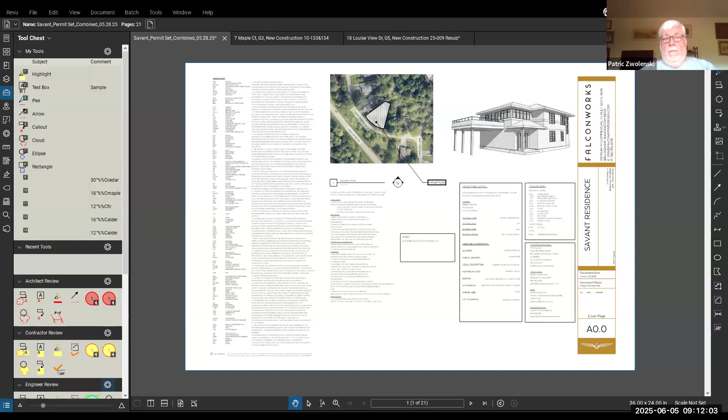Yeah, the three of us went out on Monday to look at the site and everything, and everything looks good. I'm in agreement for the variances and all. Yeah, as our policy document states, we don't generally approve carports. This is a nice design. This looks nice. I mean, I have no objection to this at all.

It really, and that's a nice feature. I wouldn't mind having that with a nice deck over my space. So yeah, it looks nice. There's no reason not to offer a variance for something like this. And it works with the lot really well.

My question with the carport, I think I saw a note in there somewhere that they're building the carport the way it's being built so that eventually the homeowner could enclose the carport and make it into a garage. Why are they not just doing that now? Financial decision? Yeah, I'm not a big fan of carports. I mean, we have garages for a reason, and we don't end up with things parked outside, and if a garage can be built, I think the garage should be built.

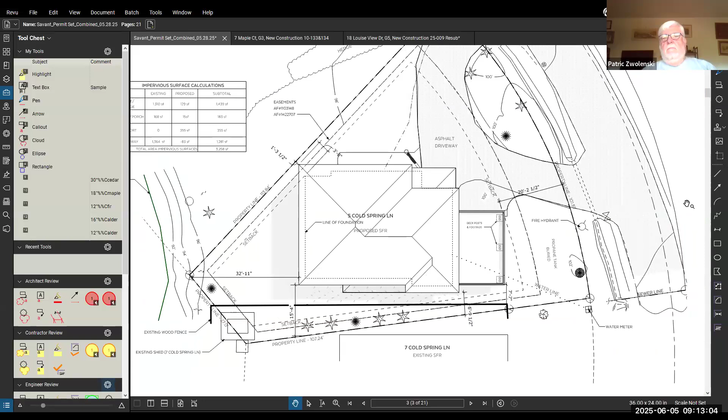Yeah, when we talked to him, it had to do with cost, wasn't that correct? I think that's always everyone's front of mind, but I think aesthetically it works for the owner's current needs. They don't have a lot of cars, they don't have a lot of stuff. I think this is just a dry place to park. So yeah, it was kind of more of an aesthetic decision. But obviously I think it could be enclosed someday when needs change.

Well, it obviously doesn't look like just a piece of plywood to cover your car. It looks like a nice structure, and that's what I'm looking at. Mhm. And I think it worked well with the lot. It is a bit of a bigger building for the space, but we are working within the constraints of the old foundation. I was very skeptical at first, Dan, and we went to look at this space, and it works for me.

Well, I appreciate you guys going to look at it. I think that makes a big difference if you can get out there and visualize what's there now to what you're going to see in the future. If it's an improvement to the community and the area, I'd rather give a little bit of a variance on property coverage or open space to make something look much nicer than not give a variance and have the crap that's there now stay there. Yeah, I think they gave real consideration to the space they're working with, and I think it's a good solution.

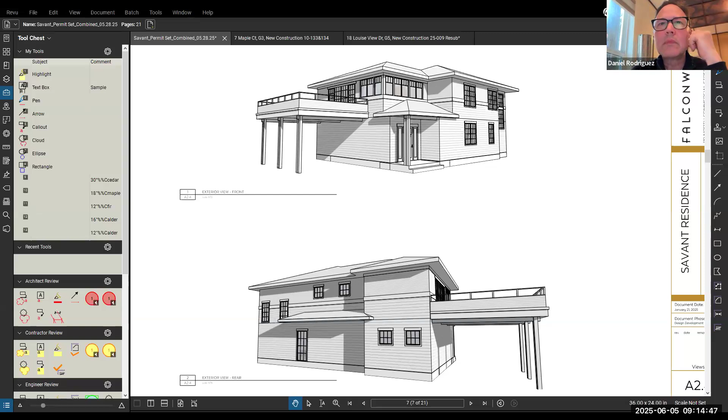Were there any other issues, Joel, that came up here? No, I don't have any other issues. They've done, I think, a good job at meeting other policy requirements, and the plans are thorough. Just a couple of little notes though. Looking at the existing plan set, it actually looked like the lines of their eaves are extending over the property line as it currently sits. So this counts as a reduction from that because they're going to bring those eaves back. But yeah, I have no other.

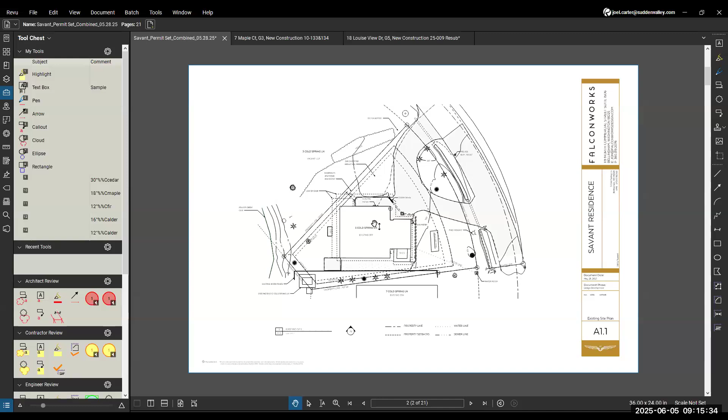So they're pulling the eaves in closer than what they're existing? Yeah, correct. They had a handful of lean-tos and homeowner specials off the back there, and it's a critical area, so we've come off of it. We've reduced our footprint. We've made our eaves smaller than we typically like them, and even jogged the foundation in that exact northwest corner just to stay off the setback. So making some effort.

Okay. Yeah, and that's appreciated. I mean, we do look at that kind of thing. And Dan, if you weren't able to visit the property, here are some photos from the Whatcom County Assessor site of what the house currently looks like.

There's a garage there now. So the garage is where the carport will be, is that correct? The same location? Correct. And then you're burying the gas tank, which is always good. Right. Those pictures look a lot better than the actual.

I didn't want to ask how old- Patric. Yeah. How old are those pictures? Oh, there were some from, I think, as far back as 2008. Oh, 2020 was the most recent. Yeah, it looked a little different the other day. Yeah. So I think, any other comments about this project?

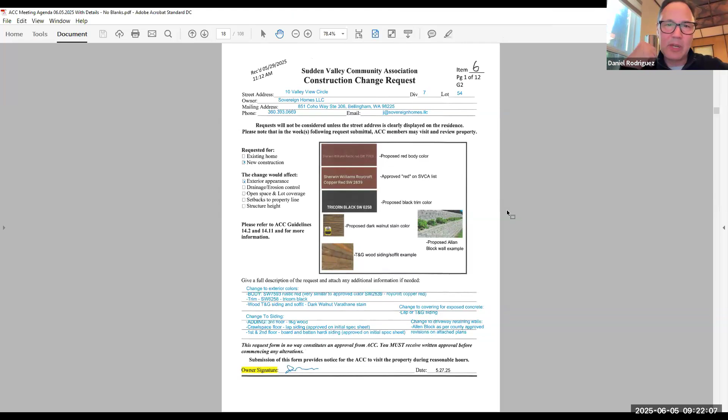Yeah, I had questions about the geo blocks. Keith mentioned them to me when he saw them coming up over there. What's the issue with that, and why did the county not permit that? So county permitted it. That wasn't the issue. It was engineering recommended that instead of doing geo blocks, for that particular type of wall that's proposed, which is an Allen block wall.

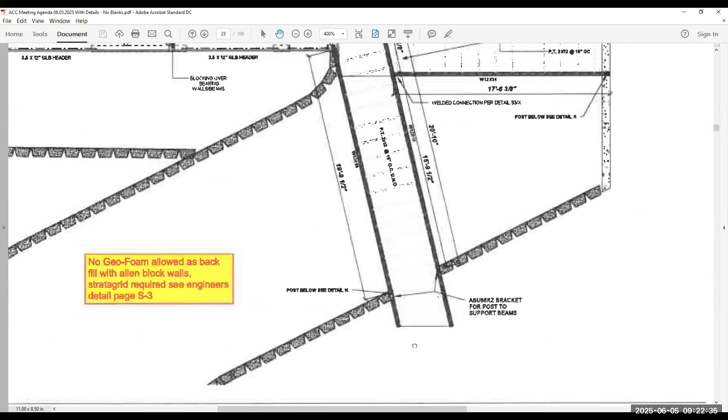My understanding is that Bradley Engineering recommended that we do some like geo grid soil thing instead of the geo blocks if we want to do the Allen block wall combined into it. So that's what that's about. County didn't have an issue.

So did you have to remove them or what? Oh, sorry. No, my mistake. Geo blocks were approved by the engineer. So what was the issue that you guys had with it? I was questioning exactly what the change was. I'm not exactly sure. Oh, okay, got it.

So just to clarify, really the main change, because there are a couple components here: colors and siding is one, and then the other is block wall. So what it is, it's very simple. Originally proposed, it was poured in place concrete walls in that area. And it's just Allen block now is what it's changed to. So it's more of an aesthetic thing that I'm here for you guys on for the block wall.

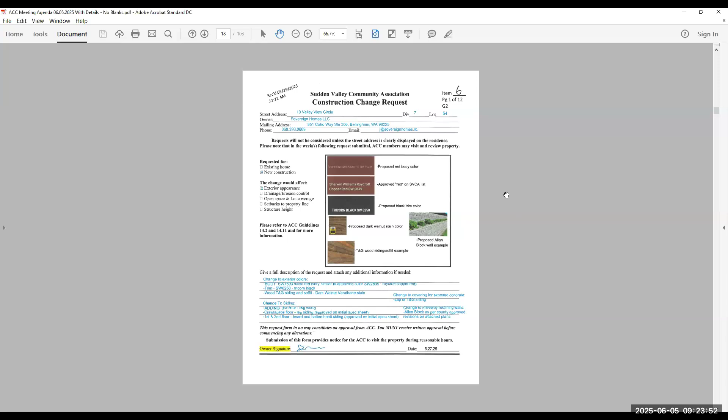So the changes to the block wall is aesthetic. They want to go to the Allen block instead of poured in place concrete. Yes, and there's still a little bit of poured in place concrete that will observe the ACC's requirements. We're going to do like a siding cover on that, so it won't be raw. So are you talking about the very front of the building where your walkway ends up?

Yeah, so I would say, Joel, if you're driving there, if you want to scroll down a little bit, you'll see, there we go. So that's the layout of the block walls. You can see the Allen blocks noted in that block looking thing. And then all the way over to the right, there still is one small section. Yeah, Joel's little cursor is right over it. That's an extension of the foundation. That is a poured concrete retaining wall there. The rest of the walls are denoted in Allen block.

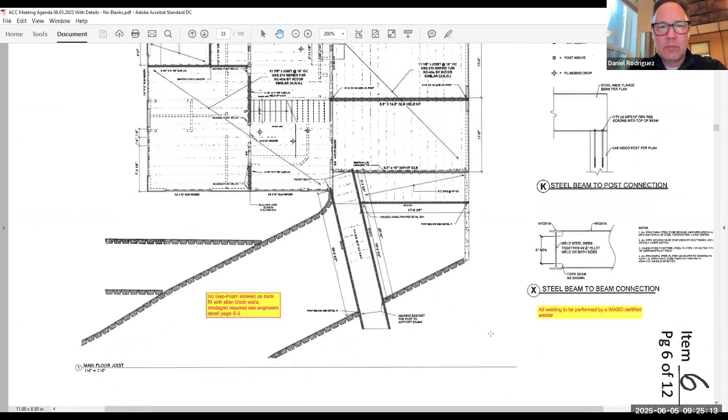So that's the layout. So Joel, do you see this as just a purely aesthetic decision for us, or is there any other issue we need to be aware of? I think as long as the engineers have signed off on it, I wouldn't worry about it. As long as the engineers are willing to sign off on it, I think it would be just aesthetics.

Okay. Well, I want to clarify, it's not a matter of like, the geofoam is not, I mean, there's a very clear note there. I don't care what the county says, but geofoam is not allowed as backfill with Allen block walls. It's not a matter of choice. You can't use geofoam blocks if you're gonna do Allen block. Right. Yeah. So there is geofoam.

My understanding is the geofoam is not in the area where the Allen block is. I don't know if you guys had a chance to look at it. There still is some geofoam that's up against the house that is backfill for that concrete retaining wall on the side, which is allowed, but we're not using geofoam anywhere that there is soil pressure against the Allen block. So we have observed what the engineers have requested. So Jay, is the geofoam just a filler of sorts? Yeah, essentially. Okay.

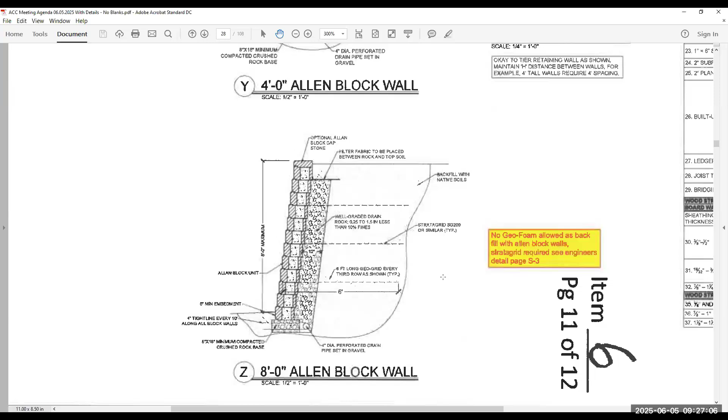It's just not stable enough to support the Allen blocks. Is that what it is? You know what it is? I think Allen block has their own specifications of what they want to see for soil support. And one of the things that they want to see is that grid. I forget what they call it, but it's a grid, and that's just an Allen block thing. That's what it is, to my understanding.

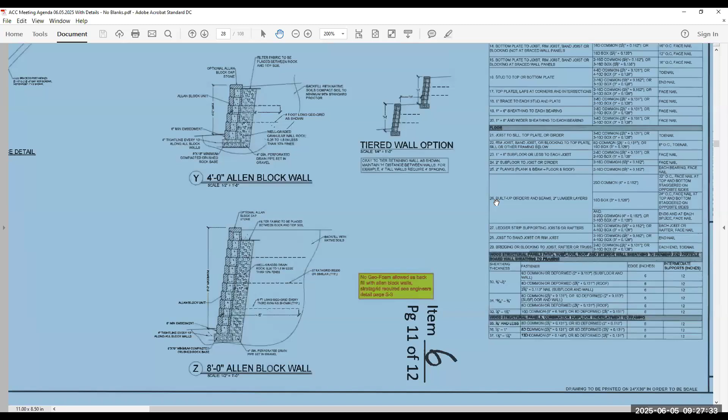Where's the profile of this retaining wall? I don't see any profile on this retaining wall. All I see is the aerial. Yeah, I think Joel's got it on the screen right here. This is your section view of the retaining wall. Oh, there it is. Yeah, and this is signed off. Bradley Engineering did this for us. Any other questions, Dan?

I've walked by this place many times and I'm not sure how any of this is going to work. There's three levels of windows. Is that wall going to be basically right in front of the lowest, the basement level window? Not the driveway, but you've got another wall that runs into the driveway there. It looks like that's going to basically be right in front of the window. It'll be 8 feet from the window.

Joel, if you could scroll down to that aerial view, the overhead again, that'll give a better idea of the layout. So yeah, that space there where Joel's cursor is, and I do know what you're talking about, Dan. That's approximately 8 feet between the windows and that Allen block wall there. It's sort of stepped back as like a terrace.

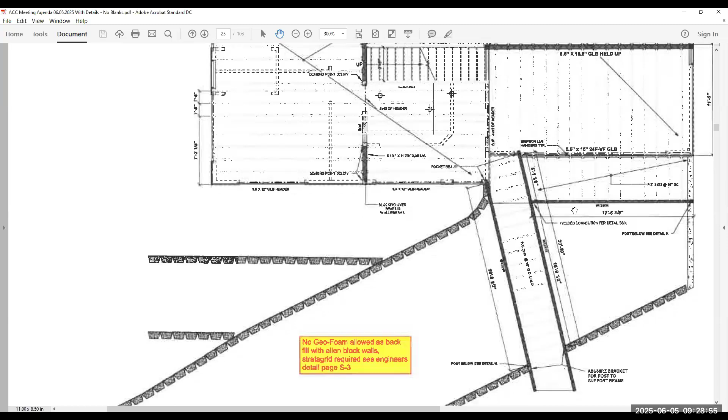So how high is that wall there? Right in front of the building? Yeah, that one. Let's see. I believe these walls, the engineering is 4 to 6 feet is what the detail is for. And that area right there should be a 6-foot section.

I think your detail allowed up to 8 feet. Oh, up to 8. Yeah. Okay. Got it. That wall there, I believe it's going to end up at 6, maybe 7. It kind of depends when it's installed, but we can go up to 8 feet with the detail. Obviously the goal is to try to keep everything as short as possible.

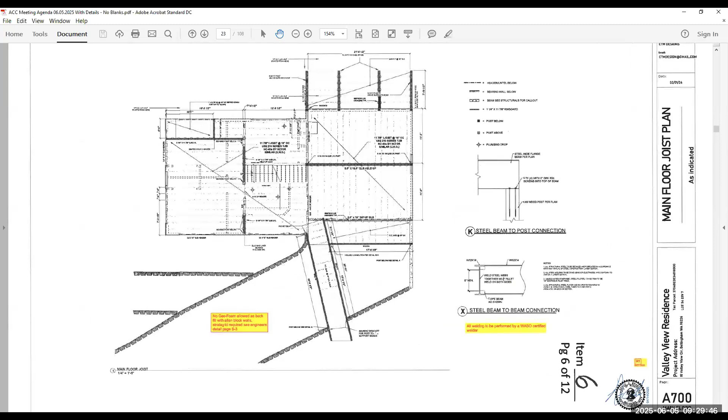Any other comments, Dan? They don't require any rebar or any concrete fill in this Allen block? So if you go down to the detail of what the engineers have specified in the section view, that's what the requirement is right there. So the magic of Allen block, as it's been explained to me, is the way it's designed. It's like a locking mechanism in the surfaces of the brick, and it kind of holds it all together.

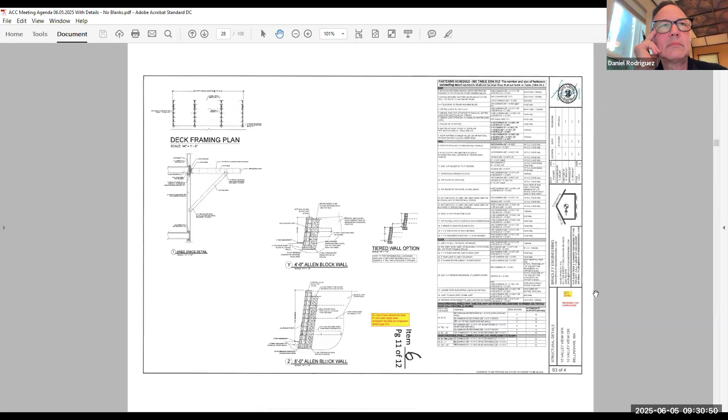I guess it doesn't seem like it's all that great to me, but if the engineer signed off on it, then it's his E&O insurance, not mine. Yeah, I agree with you 100%. So I guess we're looking at this as an aesthetic request, based on what Joel told us and what Jay's telling us. I see nothing else that concerns me that I understand anyway.

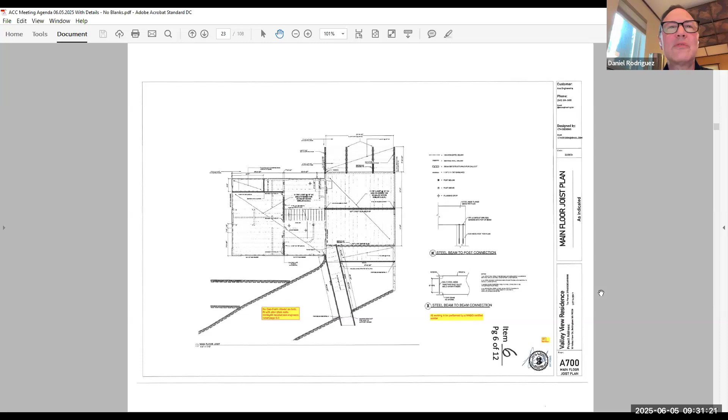And as far as your concerns about it structurally, obviously we've had an engineer do it, but there is a footing included in that as well. So I think that's helpful. Yeah, I think this is a very unusual design, and this is a solution for the space you're working with, and we have questions. Is this really going to work? At this point, we can only trust the engineers that they know what they're doing. But aesthetically, can I get a motion on this?

I move to... Was there a comment? Are we talking about just the retaining wall now, because there were some other paint and siding requests for this one too? Correct. Do you want to discuss that, Dan? This is all from one request, a construction change request.

I just was curious, it says adding third floor. Does that mean they're adding a third floor, or they're just adding the siding to the third floor? The latter, Dan. Sorry if that's confusing. This does have 3 levels, and just adding tongue and groove wood on the 3rd level. It's primarily the soffits, but there will be some accent as well. You good with that, Dan? Yeah, so we're adding some wood on the siding.

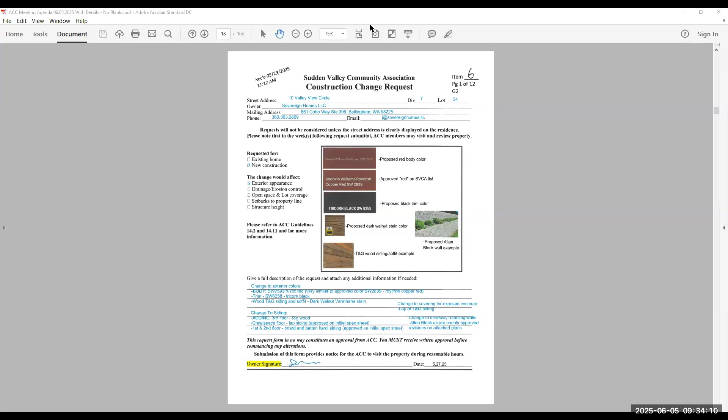Can I get a motion? Motion to approve is still on the floor. It is. Okay. And that was Patric, right? Yep. All in favor of Patric's motion? Aye. Aye. All opposed? Okay, Jay, you're all set. Great. Thank you. I appreciate y'all.

Take care. Mr. Chair, we have another homeowner join us. Jeff, are you there? Here. Okay, thank you, Jeff. You are item 7, 68 Marigold, right? Yes. All right. Well, let's jump right to that one then. Item 7.

Jeff, is this a bigger... I think John and I went out there last year sometime and looked at, you had, I don't know if it was the actual application or just talked to us about the pavers, and we looked at it, and I think it was a smaller parcel that you were going to put up there. Wasn't it smaller before? Only slightly.

This one, I just extended it so that it marries up with the stairs that are already going up the side. So it's just going to go to the end to mate with the stairs, so it doesn't look weird. That makes... Go ahead, Patric. No, that makes sense to have it where the stairs end.

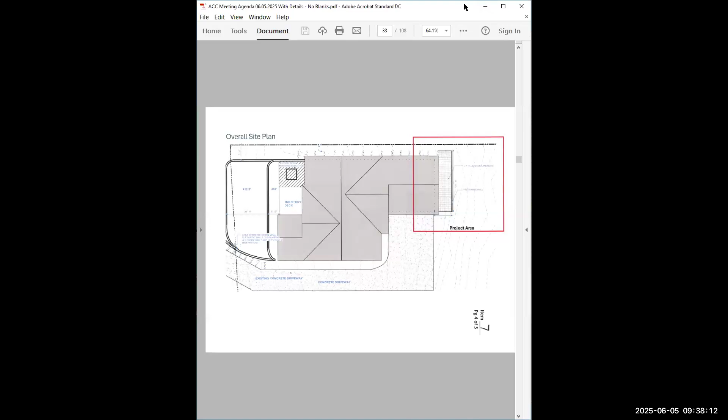Yeah, because I mean, our biggest objection when we saw your final design was that the hot tub was right there exposed. Everybody that comes by, that's what they see on your house. That's not what we wanted. So we did want some sort of privacy screen and hide it away a little bit, because of all that wall you put up there.

You're just seeing a big display of a hot tub, which if we'd seen that design, it probably wouldn't have been approved. So we were asking you to hide it a bit. And we were a little concerned that it wasn't yet, and we wanted to know what your plans were in that regard. Does anybody have any question about Jeff's explanation for the screening?

Well, I'd like to maybe request Alan to go back and look at what was approved. I do recall that the hot tub was going to be recessed into a deck. I walk by there all the time and I see that hot tub sitting there, and it sounds like they're working on that today. So if the hot tub is recessed into the deck, you're not going to see the hot tub as much. But I recall some sort of a screen. I don't recall planters, but again, we look at a lot of these.

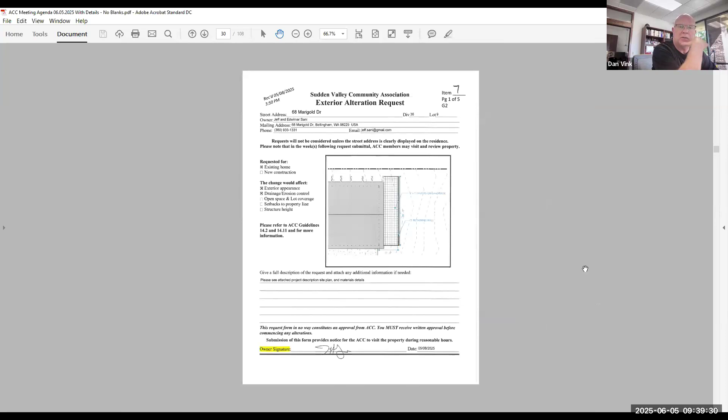So I would maybe ask Alan to go back in the files and verify what was approved for that hot tub screen. I mean, that's not what we're here talking about today. No, but I do want to keep that in mind. Yeah, I think Daniel, your question might be, do we finish up one before we approve another? I don't know.

And the other question I had on what's being proposed today, I think the same notes that everybody had, is how does this fit with open space? It looks like by the time you got the driveway and the deck and this stuff, a lot of this lot is paved over. I don't know how big the lot is. So how does this new addition affect the open space?

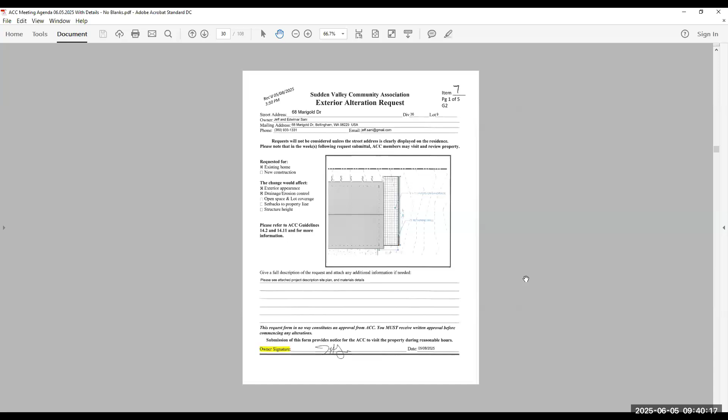Haven't you looked really into that closely, Jeff? I did, and in what I submitted, I provided those calculations. Our lot goes all the way back up to the condos, so it's quite a big lot, and we have nothing developed on the majority of it. Yeah, I think I recall that when John and I went back there and talked to you, it looked like that would not be an issue. That's right.

When you do the deck, how far of a drop is it to the ground below? Well, just keep in mind there's almost 5 feet in front of the deck before there's any wall. So you have that. Otherwise, the county, and that wall up at the top there is 4 feet, just under. All right, so that is good. Is there going to be plants from the deck to that wall?

Yeah, in that design we had some purple creeper that we're planning. I'm waiting to do that until they finish the footings for the deck, so we don't disturb the soil around those. So when they finish the deck footings and the deck project, I'll plant the creeper, and that'll pretty much fill up that entire space in front of where the railings are going to go and into the deck.

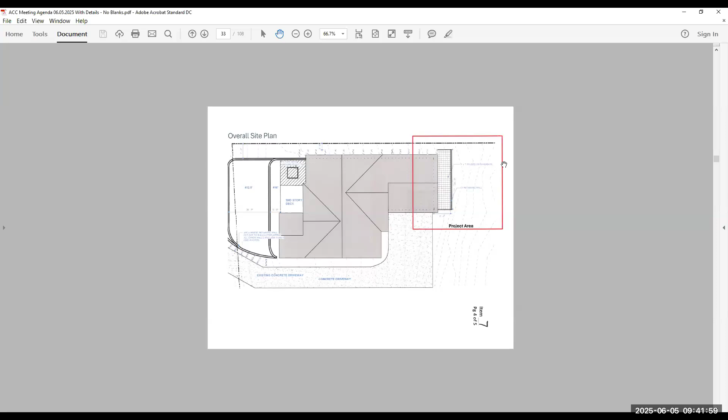So does anybody have any concerns about our initial approval linking to this one, or do we feel confident that the project will be finished? I guess we'll wait to see if Alan could give us a recap of what our motion was on that last one. Sure, I can provide that just off the top of my head. I'm familiar with Jeff and the work that's gone on there.

Okay. What we had talked about is a railing of sorts, a safety railing, clear plexiglass, which elicited the response of being able to see people getting in and out of the hot tub and all that time. And Jeff, I believe it was your wife who suggested some planter boxes be installed there. So as far as partitioning visibility, that's what I recall.

And then I talked to Jeff before the meeting, and he related to me a similar situation with obtaining county permits to do the hot tub work. So I think there's just simply been a delay in his ability to proceed with the hot tub work. If that is sufficient, I'm fine. If you want me to get the details, I'm happy to do that as well. Simply let me know if that is related to this or just an academic question.

Yeah, I think the reason we're pushing on this so much is because we were very surprised by what we approved and what we had actually seen as the finished project for the work you did in the front. And that's why we're just trying to clarify what your intentions are and make sure that you follow through with what we were requesting.

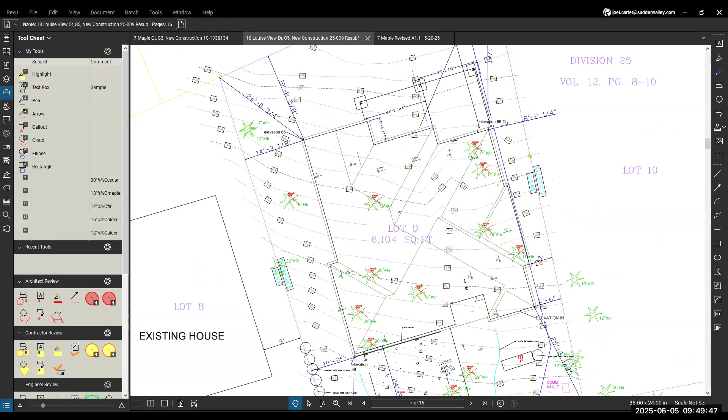Let's see. And I think for some of the footprint changes, if you give me a minute, I could show maybe some side by side, but I believe some of that left wall of the home has been shifted away from the existing house on lot 8. Oh, it has been moved. I think so. The garage, I can kind of pull up a previous plan set here and show you maybe what the previous version looked like. Yeah.

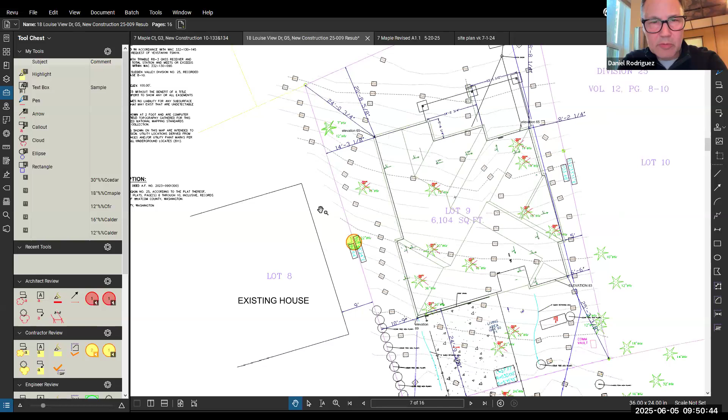There was a tree in question, the neighbor's tree or a joint tree. Yeah, it's probably this 22-inch fir tree here. Mark it. So that's the one that there was an arborist report for. Is that the one? That's correct. Yep, okay. And I think that was included with the packet. And I think this arborist report, what was the determination? I think if it was adequately protected, it could remain.

This was from Arboriginal. They did a tree risk assessment. Was that included? That was included. Yeah, I see it on today's agenda. So, recommendation: establish a tree protection zone around this tree. 9-foot diameter fenced exclusion zone. Covered with wood chips. 4 inches from the trunk.

Well, I mean, it sounds like the proximity to that tree is still an issue. Apparently, we're hoping that it could be saved with some mitigation and some tree protection. Still, it's not their tree to make these determinations. I would feel more comfortable if, for this tree on the neighbor's property, they got the permission from the neighbor, because I'm not gonna say that they can have a dangerous construction zone next to a tree that's not theirs. Whether they can protect it to some extent, it's not my call to make.

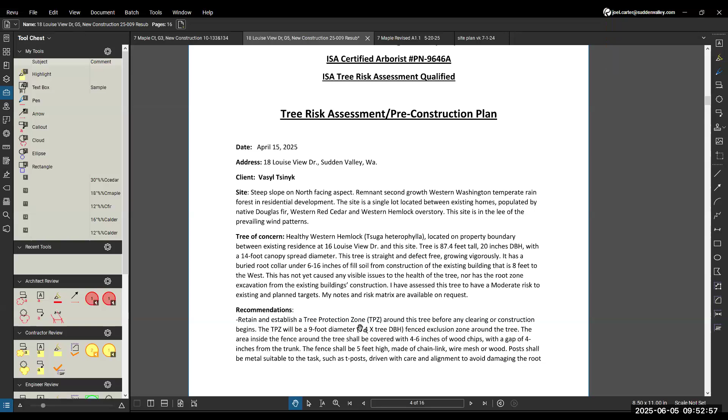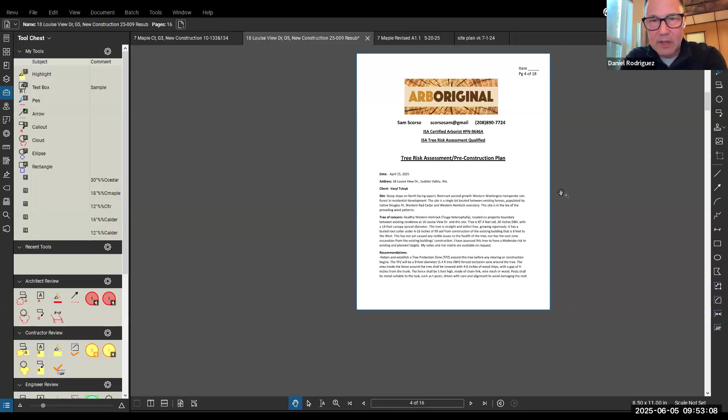Well, okay. The arborist recommendation is that the tree protection zone will be 9-foot diameter. Yeah, I mean, even to have this recommendation, it appears to me that there is some sort of danger to the tree. Yeah. I think this doesn't say that it will definitely not be injured if these measures are taken. Mm-hmm. If I had 100% assurance that the neighbor's tree wasn't hurt, I'd be okay with that. But it sounds like there's still some risk. Yeah. That's how I read it.

Yeah, I'm just looking at the arborist recommendation and noting their diameter, the 9-foot diameter, so that'd be 4.5 feet in radius from the tree, and with the eaves at 10 feet 9 inches away. I think the limit of excavation would be outside of the bounds of that tree protection zone.

I mean, it sounds like the builders made accommodations for all our other concerns, as far as I can see, but I'm not willing to endanger someone else's tree, their property, because of another construction. Unless he got approval. I mean, if he had approval from the neighbor, that's fine with me. It's not my tree. I just, we're all neighbors here, so we should be friendly.

May I speak at some point? Go ahead, yeah. Hi, this is Vijay. I'm actually actively getting reports from an arborist since I do not have access to the April arborist report. I had requested it, and I understand, because they had paid for it. I'm not suggesting a quid pro quo, but what I am suggesting is, since I, at my expense, did a recorded survey back in September of 2024, which the neighbor can access through the county at no cost, well, the cost of the paper to get a photocopy. So I've done the job of getting a recorded survey. And I wanted to comment on that, if I may, before we leave this agenda item.

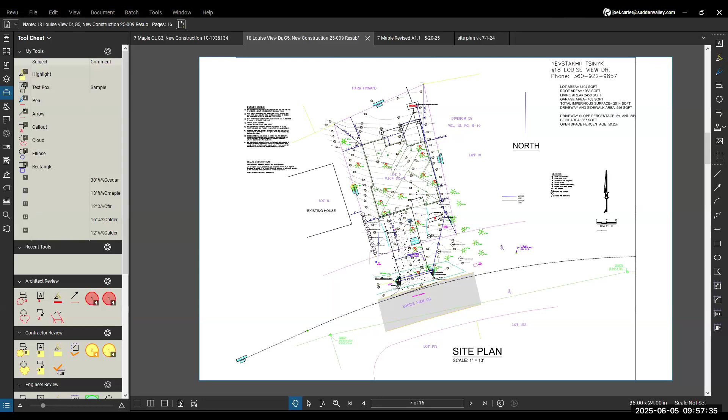Fast forward back to April of this year, when Mr. Tsinyk was actively removing the survey tape. When I asked him what he was doing, he said, well, we're going to put in our own survey and we're going to have our own stakes in here. And I said, you do realize this is a recorded survey. I don't think he understood that. He had enough English and he had someone who was speaking clear English right beside him. And I said, would you please ask Mr. Tsinyk to cease and desist from continuing to remove the tape, or I'll have to come out there and call 911. And after a little bit of discussion, they just left the site.

The other thing he asked me was, do you have the old yellow pins? I said, which pins? He said, to mark the boundaries. And I said, I have nothing to do with that. County had required it to be removed by the surveyor, and it's gone. You only have one survey pin on the south side. The reason I'm mentioning all this is these folks are not good actors. They're not going to be good neighbors. They're going to do stuff, and they're going to pull stuff, which you don't want to hear right now.

And I know it's being recorded, but I want it to be recorded because they have been incrementally trying to destabilize my right to the property, by either stealing some land. I mean, this is like playing silly buggers, if you excuse the expression. I mean, it's just nonsensical stuff.

Anyway. Well, Vijay, it looks like there's enough setback there. That's not an issue anymore. It's not the setback. It's not the setback. It's the fact that they're constantly trying to undermine what is actually a legally defined boundary line now. Yeah, and I think, I mean, that's not anything our committee can really be concerned with. I mean, well, if you... Daniel, I don't want to belabor the point. You've got a lot of items on the agenda.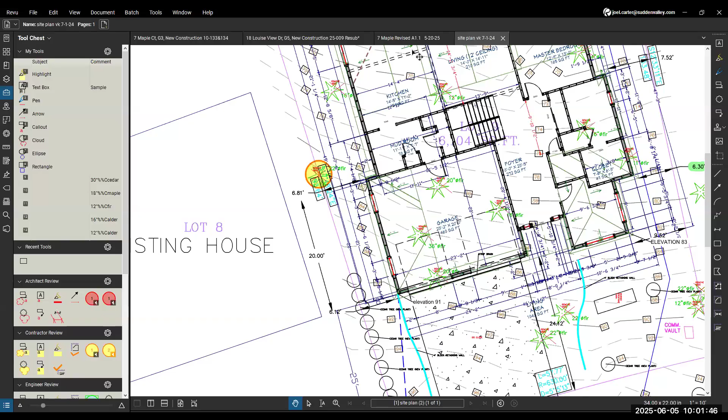But as far as property lines, that's kind of beyond our scope. No, it'll have to be a legal thing. I think I have to stop them legally, and I'm going to go after them for the expense as well. But there's one other thing which is very important because it's part of their site plan. Are they still working on the 2024 site plan? I thought they had to go to the county, get a new plan, and resubmit it because they didn't finish last year. Joel, what's the call on that?

To the best of my knowledge, no. If they've submitted with the county, and I'm not sure where they're at with county review and approval. Well, I talked to the county. I just want to fill you in. I talked to the county and they said they're still on 2024. And I said, are they able to do that? They said, well, they have not officially requested a reopening of this. But from what I'm reading of the SPR 2024-0073, if they had not finished and resubmitted an extension approved by the ACC, they had to file a new 2025 SPR.

I may be wrong, but I think they're doing an end run by wasting your time by doing this, and they're not even here today. I think they are here. Yeah, they are here. Oh, they are. Okay. Joel, do you have any concerns about that? What he just said?

That would be all county side stuff. Okay. You're reviewing things for Sudden Valley's ACC policies. Right. So then they have to resubmit this to the ACC after it's approved by the county, right? After it's been approved by the ACC, if construction has not been started within 1 year, then reapproval is necessary. But because it has not yet been approved by the ACC, that 1 year clock has not started yet.

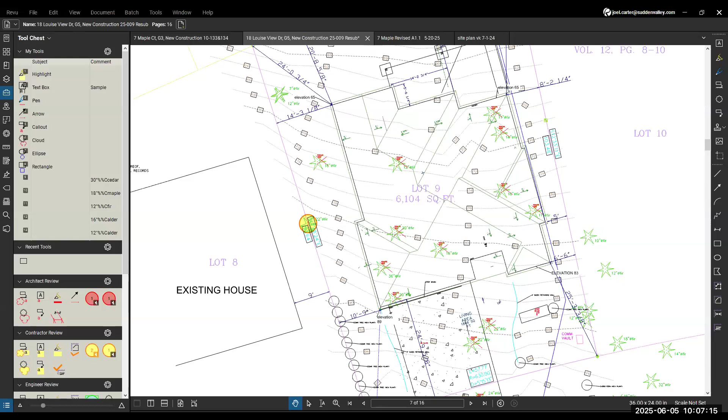When I look at the arborist report, it says the tree of concern is a healthy western hemlock. Is that the same thing? No, unless it was misidentified earlier. I thought it was a Doug fir. I'm going by arborists that I've spoken to. Well, the notes on page 2 of 16 for item 14, comments from a previous ACC meeting, were we need arborist reports for the 22-inch fir tree on the left side and 3 trees in the front, 8 and another 22-inch alder.

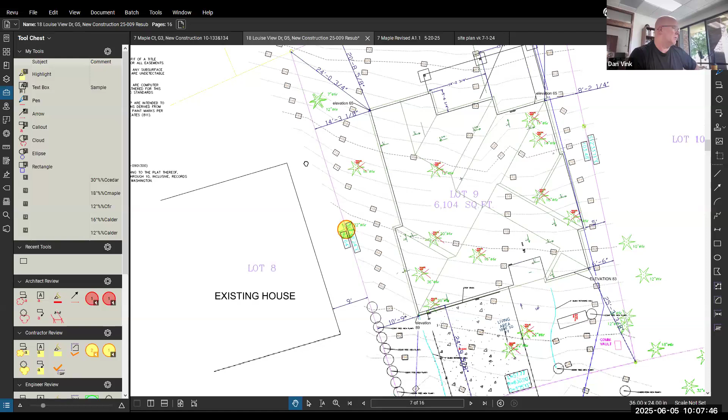The arborist report that's in here identifies the tree of concern as a healthy western hemlock existing between the residences. The tree is 87 feet tall, 14-foot canopy, et cetera. So I don't even know if we're talking about the same tree here, are we? It might be the same tree. If they misidentified it, I don't know. We'll have to get people on site to identify it correctly then.

My guess is if it's misidentified as a fir tree on the survey, it was probably by the surveyors, because I think an arborist would be able to better tell the difference between a fir and a hemlock. Oh, absolutely. Yeah, Dan, I agree. I mean, it's a tree, and a lot of trees have to come down. But if this is a shared tree or even a neighbor's tree, I would feel very uncomfortable approving the construction to go ahead. It's nothing to do with 18 Louise View. It is actually 16 Louise View property.

Well, I think that tree. I think, yeah, if I can just get a comment in here, you're probably gonna like my take on this. I've got some questions about the stormwater, but maybe we don't even need to get to that right now. Here's my take, Daniel. I see some confusion around the property line here. There seems to be a disagreement about what protects this tree and where this tree lies.

I have an obligation and a sense of responsibility to the existing homeowners in Sudden Valley. So I'm not comfortable going forward approving a project, even though it looks like they've made a lot of changes and moved in our direction on property coverage and height and so forth. If our approving this has a cloud over it related to this property line and this tree, and that results in one of our existing homeowners in Sudden Valley feeling like they need to take up litigation or legal action against the developer, I'm not comfortable being put in that position to make that determination and side in the favor of the developer in this case.

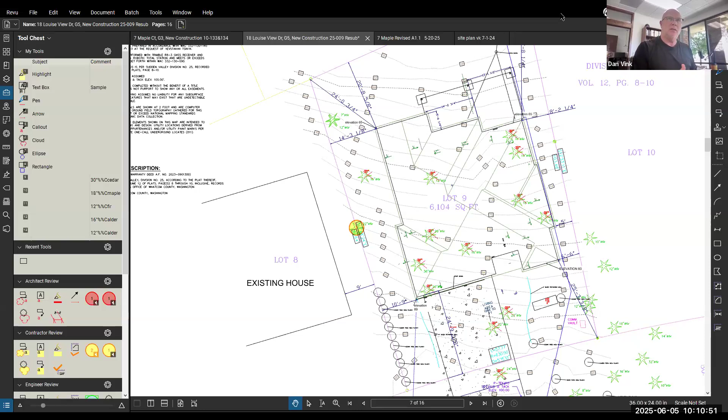So, Dan, may I make a point of clarification? Go ahead, VJ. I have a recorded survey. I will resubmit it to the ACC. Please look at it. Please have Joel look at it, and he can interface with the county auditor. This is a very clear recorded survey, and all that has to be done is to take the survey and put it over the existing map of ACC, with the arborists involved, to show the surveyor has actually indicated by doing the recorded survey that this tree is firmly on 16 Louise View.

Previously, it was not clear because tapes were being put up without any way of substantiating it. But I did the recorded survey because it was suggested by a member of the ACC, very correctly, and I'm glad I did. It was an expense to me, which has not been shared by my neighbor. And therefore, I think I'm well within my rights to say, if this recorded survey shows the tree within my property, then it's my tree.

Do we have that recorded survey? I mean, a survey is not just a matter of somebody going out there and sticking a pole. No, this is a county recorded survey. I know that a recorded survey has to be recorded at the county. Correct. It has been recorded by a surveyor. Hold on a second. You can't just go out there, and if you're going to do a recorded survey, it has to be recorded at the county. So if there's been a recorded survey.

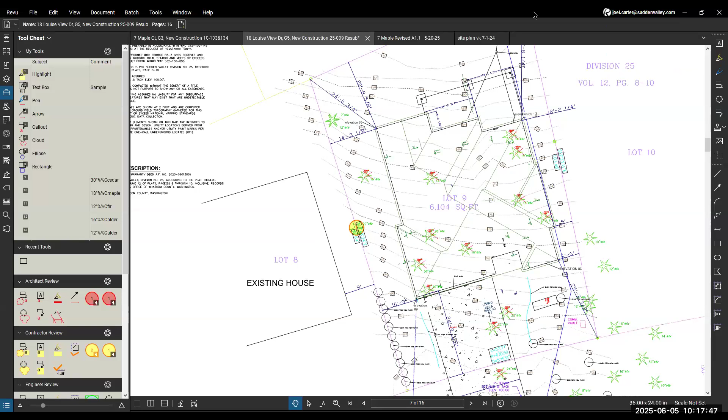So if there's any problems with the project, like the house or a survey... I know that I submitted the new project that was a 3-floor house, and right now it's a 2-floor house. I made a lot of changes, and I would like to know if everything's good. Dan, did you have some questions about non-tree related subjects?

Yeah, the stormwater, I just had a question about, let me refresh my memory on that. Yeah. We had talked about the stormwater going out the back end. It looks like it would require an easement to go out the back. Sudden Valley just generally doesn't grant easements. Did they give an easement, or so you're gonna pump that up? That's correct. But there are no houses or lots or anything on the back side.

So if that pump fails or the sump pump plugs up or something like that, and it ends up overflowing, it's just going to drain back down into that open space back there, right? That's correct. And all the stormwater systems are designed with an overflow. Right. I think that was the concern I had. I want to make sure, just being consistent, like on the Valley View, they wanted to pump up also, and we said no, because if that thing fails, you're going to be flooding your neighbors down below you. But there are no neighbors.

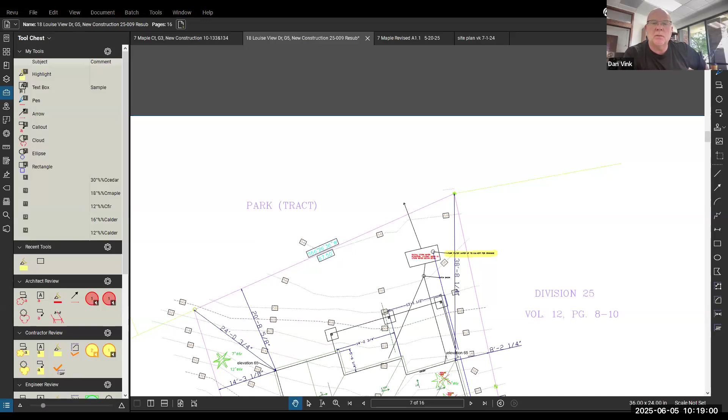The next thing is the road back there. Yeah. Okay. And yeah, that's correct, Dan. I could see that's all park space back there. How about the sewer? Where does the sewer go to? Let's see. I believe there is a sewer line down there. Let me see if it was on this plan set here.

So do they get an easement from this association? The association will get easements for sewer lines, just not stormwater, right? So yeah, there is a manhole right there, that S25-4. So Sudden Valley's current position is that if there's existing sewer infrastructure in place, they will grant an easement to connect for sewer. Okay, just not stormwater. Correct. All right. That satisfies my question.

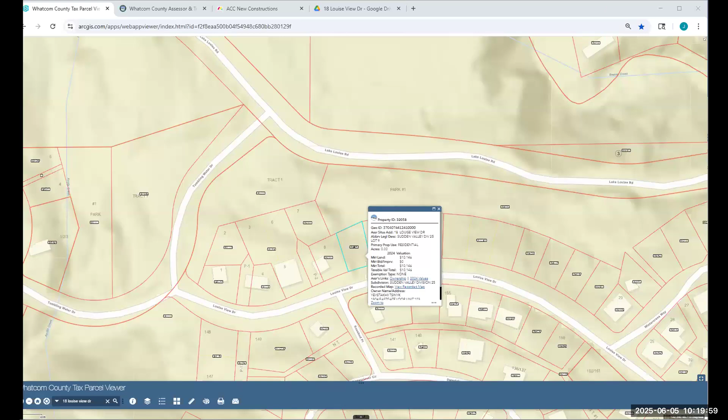Yeah, go ahead. You there, Vasil? Can't hear you.

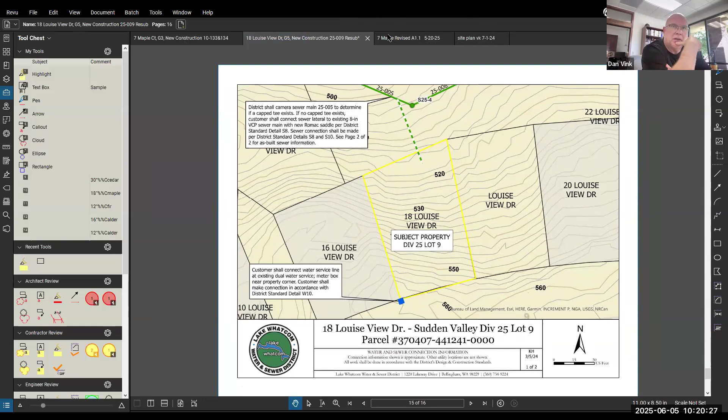So I think Daniel, to me, it all comes down to this tree. The picture that Joel was showing earlier of the monuments, those are on the front left and front right of the two properties respectively. It would be just as important to see where the monument is on the back left and the back right, because you'd string that line between them. They can be off by a few inches on the front, but where it goes to on the back is going to be the biggest question.

So for me, I want to see everybody agree, like, yep, this is the property line and this is where the tree's at, and it's on the neighbor's property or it's on the property line. In that case, we can make a better decision as to whether the builder is taking the appropriate steps on the tree or not, and whether the neighbor has a say in this tree or not. But at this point, we don't have that information, so I don't feel comfortable moving forward. I think we just need to move on.

Joel, how could we get that confirmation? Sorry, confirmation for the property lines. We have the drawings here, but is there something else we can get to clarify? We could ask the builder to stake and string that property line, and then we could walk down the line and see where that line is relative to the tree. I'm sorry, Joel. This has already been recorded with the county. So for the builder to do it means that you're giving him the leeway to do whatever he wants. I've taken the time and the expense of getting a recorded survey with the county. It should count for something.

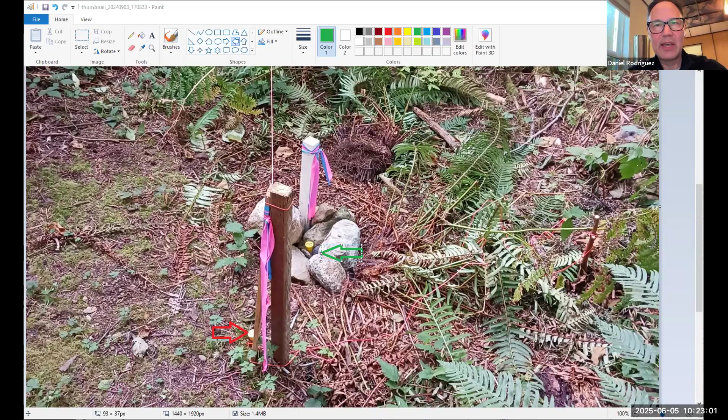It's not even touching the tree. Okay. BJ, as far as I'm concerned, I'm going to defer to Joel as to determine what constitutes a proper property line, because I have no other expertise and Joel's our guy. And we'll see where it hits that tree. I mean, I can't imagine that it's going to move enough. Daniel, I'd be happy to meet with you on the property and we can do it together. Yeah, and then if it doesn't touch the tree, that's fine.

ACC and myself, we have no stake. And Joel, can you commit to meeting with me and walking where that tree is located? You can have the contractor also, but I need to be there. We could work that out. And I have one other request, Daniel. At this point, the request is very simple.

I do not want Mr. Tsinyk or Vasily to come onto my property. They're damaging my vegetation on the steep slope on the eastern side. So I am banning them from the property unless I'm there. Okay. And I've given them written permission. I got you. I have one more. Vasil, are you with us?

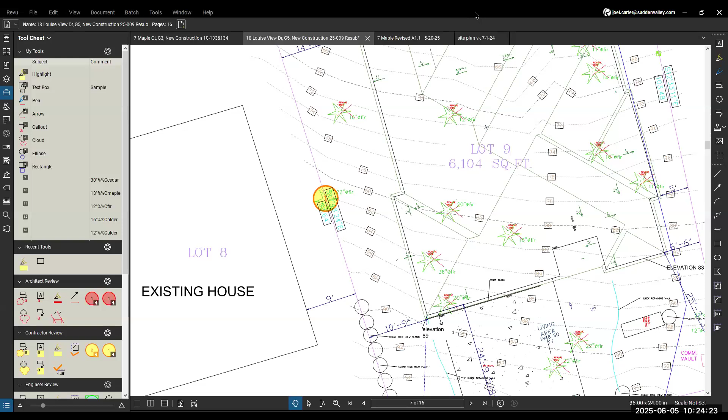Yeah, I'm with you. So I know this problem with the tree took a lot of time, but I would like to know more about the new project I submitted, because the problem was with the tree like a whole year. And Vasil, from what I'm reading from the committee, I think we appreciate everything that you've done. You've done just about everything we've asked for. Does the committee have any other concerns other than the question of the property of the tree? I have some questions. Yeah, go ahead, Patrick.

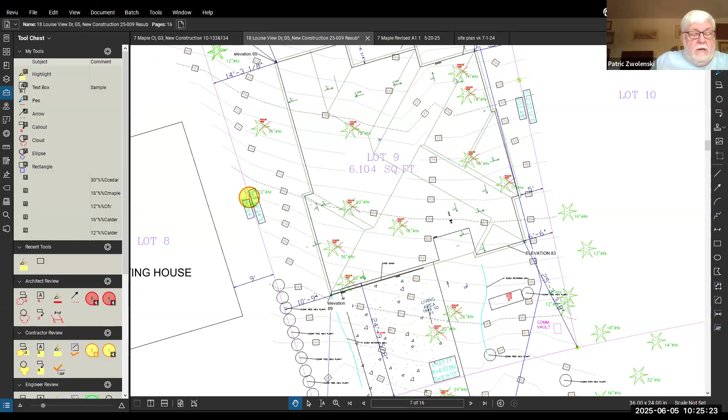Okay, no matter where the property line is, VJ has an interest in the tree, either half or complete, correct? Right. I believe so. All right, the arborist reports had recommendations for tree protection, which would take effect even if the tree is entirely on VJ's property. The builder would still have to comply with that, correct? Yes, they should. Okay, so I guess we're trying to approve whether that action for protection of that tree is ample. It doesn't matter if he owns it completely or owns half of it, that tree has to be protected.

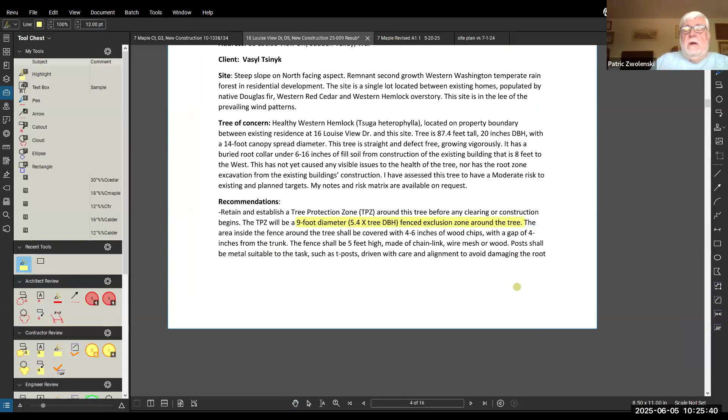And are we approving that protection of the tree, or is that not appropriate? We've got an arborist report saying that should take care of it. Well, he's not guaranteeing that the tree won't be harmed. That is a protection, and it's not my tree. If that were my tree, I would not be comfortable with that. And I'm putting myself in VJ's shoes and saying that he wouldn't be comfortable with that either.

That's right. Because even on the arborist report, there's some risk to the tree. And that's not my tree, that's VJ's tree. At the very least it's half his tree. So he should have some say in any risk assessment for this tree. Well, that's all I'm saying. Should he have another arborist report from his own arborist saying if that tree would be protected? It's up to him, whatever would make him comfortable. This is his tree. He needs to make the determination whether it could be put in danger. No, I do not want to put it in danger.

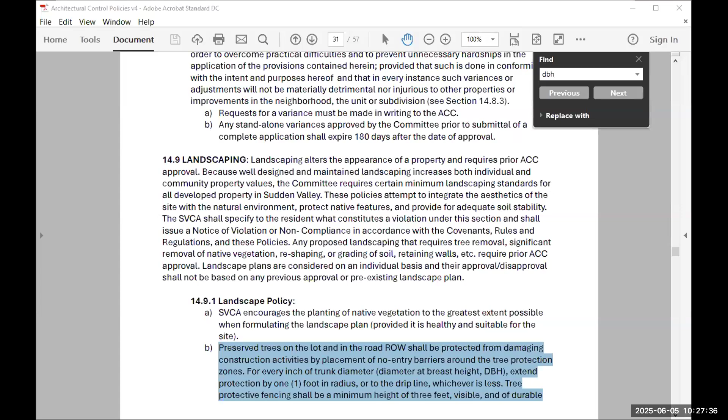This is from the 2025 policies, and I can double check it with the 2024 tree protection zone, but the current 2025 policies do provide for, now I'll let you read it. For every inch of trunk diameter, extend, what did that say? 1 foot, at breast height. Well, so it says a 22-inch fir, and the other one has got a 20-inch hemlock. So there's a question to me as to whether we're even talking about the same tree or not. Probably are, but we don't know.

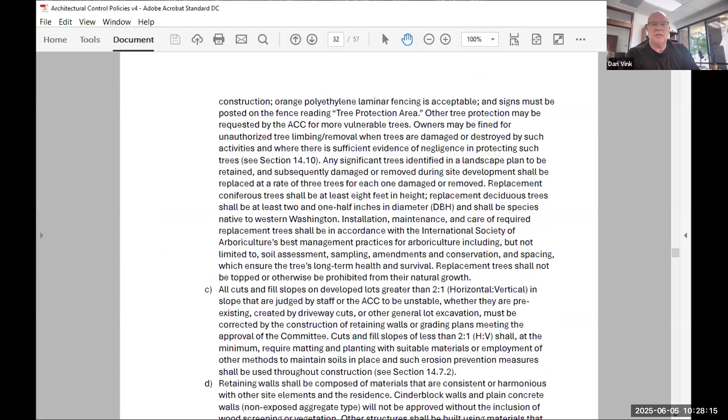Patrick, the way I look at it is, VJ's got an interest in the tree, there's an arborist report. He's not satisfied with that arborist report. We have to take it at face value unless we've got something else. But I don't want to put myself in a position where we've got an upset existing homeowner in Sudden Valley because this project has not clearly defined the property lines, who owns the tree, whether it's half owned or all owned, and whether this is adequate protection. So I should make a new survey, right? A new what? A new survey.

Whatever would satisfy VJ with regard to that tree. Yeah. As far as whether he's happy with where exactly the line turns out, that's not our concern. Yeah. My only concern is his property, and I'm not going to approve putting it at risk. I think other than that, what you did with the property, I think it checks all the boxes for our committee. I mean, is there any other concern other than the property of the neighbor?

Can we ask VJ what he thinks an appropriate level of protection would be for that tree? Well, I'm actually working on, thank you, Joe. I'm actually working on an arborist report, and I think there are some issues. I do not expect everyone to have the professional knowledge. It's very hard. You guys are doing a fantastic job, and thank you for that.

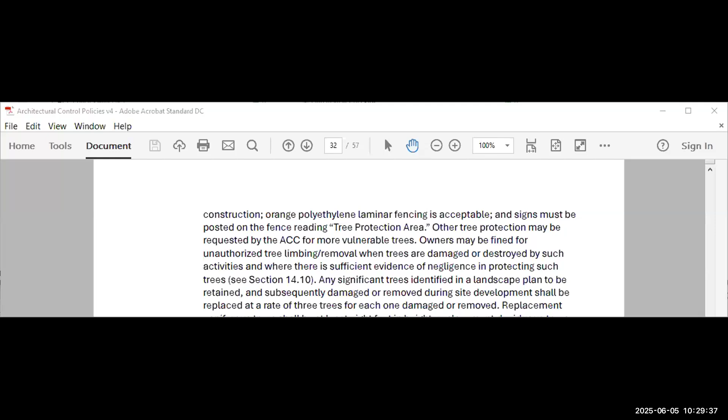As far as the tree protection, it's partially covered in the HOA regs, the ACC regs, but the arborists will talk about a foundational protection, root protection, and then a critical root zone protection, which extends into the neighbor's property, unfortunately. And as a reference point, I'll give you that massive 197-foot Douglas fir that is on the northeast corner of my property. And that protection, critical root zone, is far greater than even the hemlock or the Doug fir that is on the property, the one that we're talking about.

So we have some issues about critical root protection because, and let me just say this, the foundational root is basically you're doing the basics of protecting the foundational roots. But then you have the critical root zone where the contractor's heavy equipment can kill the tree by inches. And by that, I mean, it can fall tomorrow, it can fall next windstorm. And by the way, when you start taking down a lot of trees, there are 18 trees, well, there are 2 trees that are already down. They should be part of the assessment from 2023.

But all the trees that are near Louise View Drive, we have not even talked about wind shear. Our forests have trees that are close to each other, which is what has protected us. Well, we do consider that, VJ. We're looking at the whole picture, and we've already considered that. But when you take out those trees, this is specifically, no, I'm actually talking about this tree. When you take out those trees, this tree then becomes vulnerable, even more so because of the wind shear. Well, we understand.

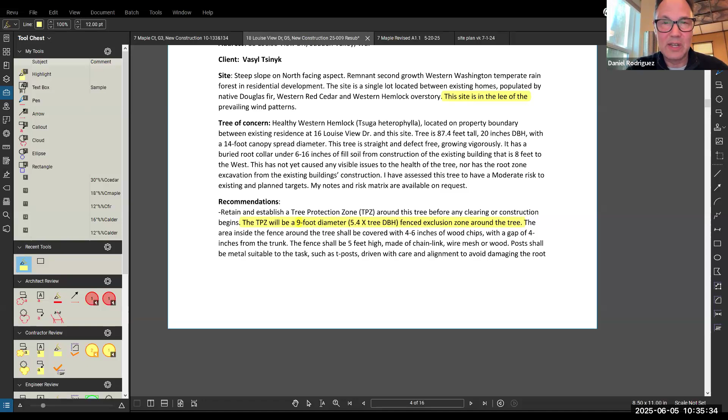And that change, you could do that as quick as you want. We don't have to wait till VJ gets it. It has to be something that we're satisfied with. As long as we're satisfied that the tree's not in danger, we can move forward. But he's going to disagree again, so he will take time again. He'll say, I want a report because your report is not correct and all that. He's doing this every time.

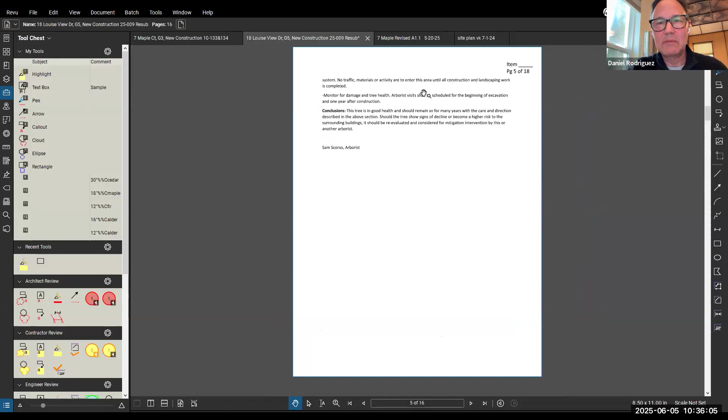So if we get a legitimate arborist report, not just an invoice, we'll review that. And if the tree is not in danger, as far as we're concerned, it's not in danger. So there's nothing that VJ would have to say about it. I think at this point we're recognizing that VJ has either a full or partial interest in this tree. So in order for us to go forward, he either has to say, I'm comfortable with the plans as submitted, which he hasn't done and isn't going to do, or we need to have an arborist report that says, under no circumstances is the construction plan for 16 Louise View Drive or 18 Louise View Drive going to compromise the long-term integrity of this tree. Absent that, we can't approve it.

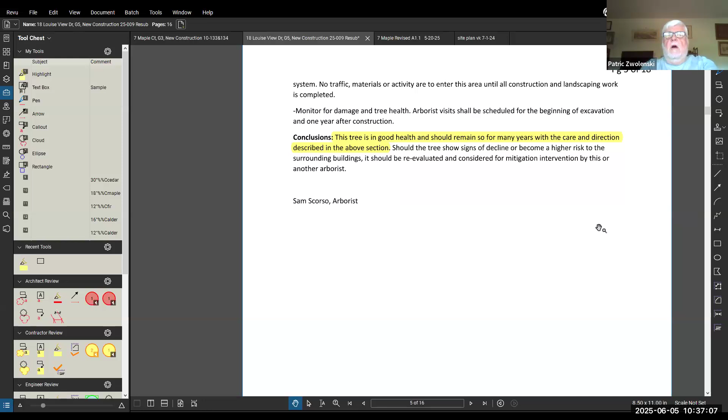I'll make a motion to deny the submittal with that direction, that the contractor either get written permission from the neighbor to go forward with the plans as submitted, or provide a certified arborist report that says that this tree will not be compromised as a result of the construction. We do have, I mean, the arborist report does conclude that this tree is in good health and should remain so for many years with the care and direction described in the above section. Yeah, we've got that from the arborist. So the builder's already got the arborist report.

The neighbor is raising concern about it. I'm sorry, I don't agree with the arborist report because I haven't seen it. It has not been provided to me. VJ, when is your arborist scheduled? My arborist is actually writing a report. All right. So it should be any day now? No, I don't have a date. Your arborist has come out and looked at the tree?

They have. I will amend my motion to say, motion to deny pending resolution of this tree issue that can be resolved one of two ways. Either the builder gets permission from the neighbor to go forward with the plans as submitted, or the neighbor submits his own arborist report, at which time we can take this up again, exclusively related to this tree issue. Do we want to put a time limit on when we have that alternative arborist report submitted? Within 30 days. Within 30 days. So should we say he'll have to have it.

Well, he's working on the report now, so we could have it for our next meeting. Yeah, so if the next meeting would be the 19th, the following one would be July 3rd. I would say by the July 3rd meeting, 30 days, give it 30. Okay, give it two ACC cycles. So we would have to receive it by the 26th of June at noon in order to apply it to the July 3rd meeting. Yep.

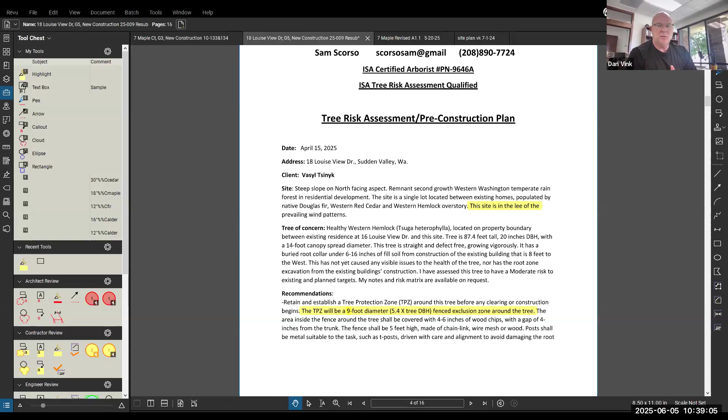So that's the plan, VJ, is we put everything on hold pending this tree issue. The builder has given us an arborist report that, while very light, does seem to indicate that the tree won't be compromised. I have some questions whether they got the right tree. They identified a hemlock. The other one says fir. We can take that up later. But in the meantime, I think you need to go get an arborist report that either says what he's doing is okay, or here's why it's not okay and what needs to be done to make it okay.

Okay, we've got a motion on the table. May I ask a question, Alan, Daniel? Go ahead. Thank you. Dan, to repeat what I thought I heard you say, this is being denied pending resolution of the tree issue. The tree issue can be resolved one of two ways. Either the builder gets the neighbor's approval regarding the tree, or two, the neighbor submits an arborist report within 30 days. That gives us additional information to look at. Otherwise, we're going to have to go on the arborist report that the builder has provided. Got it. Thank you.

That's fair. That's what I was going to say. Thank you. All right, all in favor? Aye. Aye. All opposed? Okay, I think that's clear.

Thank you for everybody working through that. Thank you. Thank you so much. I'm so thankful for this. Have a nice day. Thank you. Okay.

Let's go to 23, 10 Shooting Star. Alan, we got other information about this. Was that part of this application? There were two things. There was a request for car parking on the street for both 8 and 10, and then a request for a tree removal for 8 only. But you sent us some information about... There was a narrative that Slav provided that spoke to the benefit of the parking area, that it would not be gravel, it would be an ecologically friendly surface. Mike Brock from maintenance said that that would be beneficial, and he went along with Slav and Ilya's suggestion for long-term parking in front of 8 and 10, not just temporary construction parking.

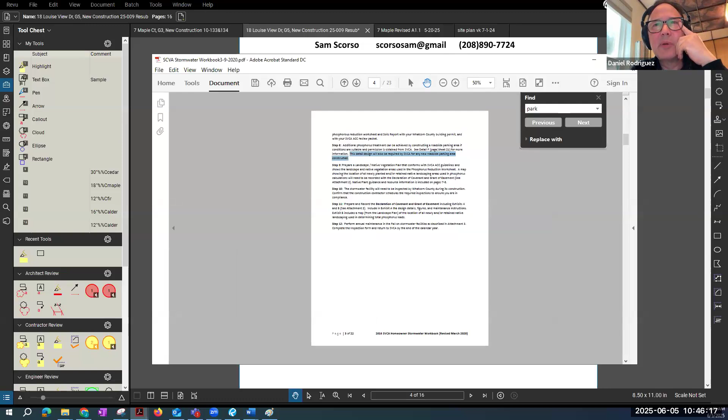Okay, what would really help me is if you guys would do some partial approval on this, so that before we move fully into these lots, we start working to solve this drainage mud issue. So if you guys could approve putting in the culverts and the gravel across the whole thing for now, and then we can discuss whether it could stay that way or move forward with the top coverage with these pavers and the grass. Has that plan been looked at, Joel? As far as the drainage? I don't know yet if Mike has. I haven't seen the email response from Mike.

I should comment though that it sounds like there's a temporary parking that's being proposed currently. And then there was another email I saw explaining that there may be some desire for some permanent parking, but that was on the other side of the driveway. Is that correct? Well, basically between the driveways is where it would be, and that's a long-term solution for the neighborhood garbage cans. So long-term would be to make it permanent. Actually, Mike said that it would help with the snow removal in that area too.

Okay. Yeah, I think the only concern I'd like to comment about, and this has just come up for discussion: I know city and county are discussing stormwater improvements, and Sudden Valley is part of that conversation. And one of their bullet points was about creating roadside parking spaces, and the need to mitigate the phosphorus and design to treat the stormwater runoff from those newly created roadside parking spaces. And this SVCA homeowner stormwater workbook does talk about it and provide the detail for it.

This is a little bit of news to us right now. I think they just had a meeting yesterday with the city and county, a joint meeting talking about some of these things.

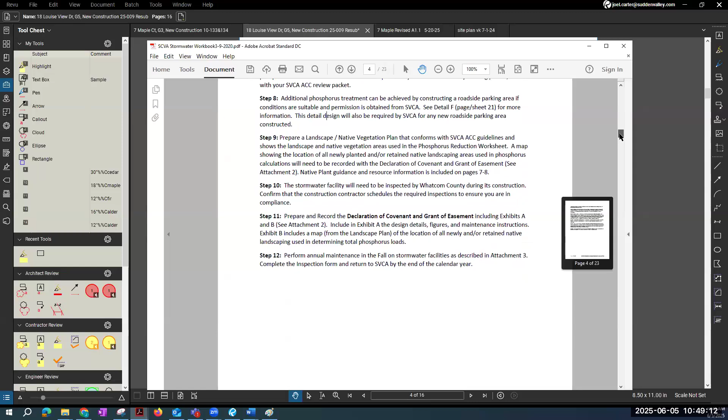It says additional phosphorus can be achieved by construction of roadside parking area if conditions are suitable and permission is obtained by SVCA. There is a detail F for more information. The design detail will also be required by SVCA for any new roadside parking area constructed. But I'm not sure yet if there is a minimum square footage criteria that needs to be met before this sort of treatment trench below roadside parking needs to be implemented.

Is that for temporary parking too? No, I don't think so. So that's what I was going to move on to say. I think granting temporary parking may be acceptable as is, just to put in some culvert and gravel, as long as it's removed. But I think if it is going to be permanent, this stormwater treatment system detail and possible requirement for it needs to be considered.

Okay, so we'll consider that whole permanent part of it at a later date, I think. But as far as you're concerned, that doesn't affect this temporary parking. To the best of my knowledge. Gotcha. So a question for you guys, if I could have a word. Go ahead. So we proposed, per recommendations from the rules and guides, a type 1 basin in between, but that's for permanent purposes. If we're going to move forward with temporary, then that basin would not go in there.

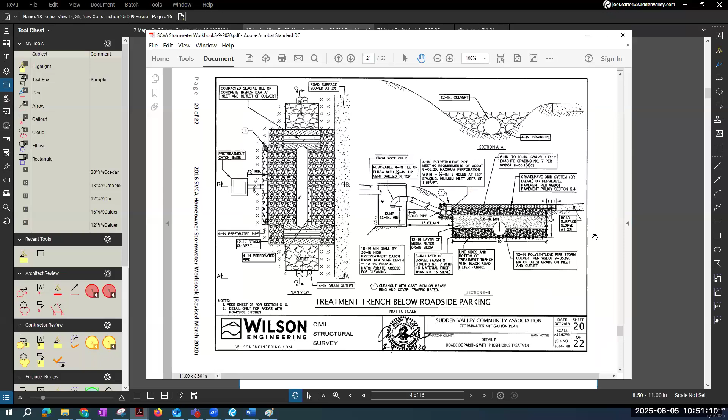That'd be a good question for Mike Brock to approve. So this would go to Mike after us, right, Joel? Yes. This will go to Mike no matter what. Okay. So Joel, what you just shared, are those draft guidelines that the city and the county are proposing or working on? These have been existing for a while. Do they want to see this phosphorus program on any parking spaces that are approved by Sudden Valley? That's what we need to figure out.

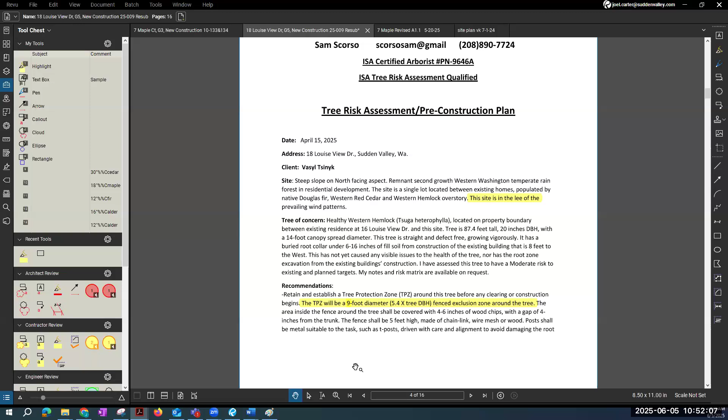That's still pending. There was something I saw that said there was maybe a 500 square foot threshold, right, Joel? Yeah, no more than 500 square feet for a parking spot, which is huge. So then it needs treatment. Correct. Okay, setting that aside, this is not fitting in that description. What we've got in front of us is a request to install temporary construction parking. That was the original request, a culvert and temporary parking, and that was updated with the pavers and grass. But the request hasn't been updated.

So if we're gonna approve anything today, all we can approve is the temporary construction parking and the culvert. If the contractor wants us to approve the paver approach, that's gonna have to be a resubmittal anyway, but if they don't want to do it twice, then they're gonna have to pull this, or we'll deny this, and then they can submit for temporary construction parking and permanent parking. Well, it sounds like he doesn't even want to do it while he's still in construction. Is that correct?

So let me explain myself. The question is, if you guys approve it as a temporary, and have intentions of approving a permanent, I don't mind getting more details on the permanent one. To install that basin, it would just require a 4x4 area to be changed. But if you approve it today, we could put the culvert throughout the whole thing, put the gravel, keep it temporary for now so we can access our lots easier, because that's the problem with all the drainage and mud.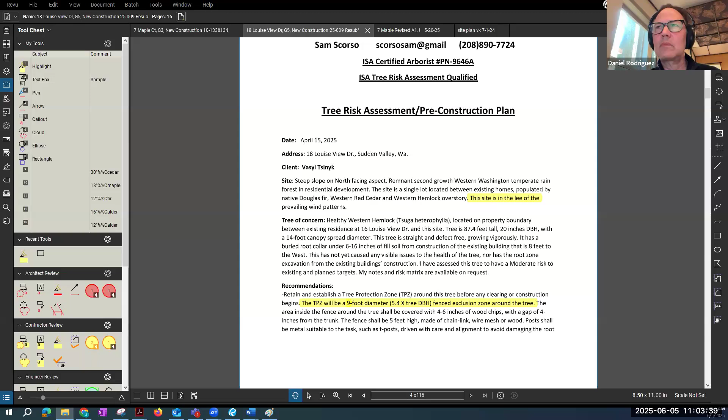Item 12, Vlad. Vlad, okay, yeah. Yeah, I didn't write his name down. Okay. Item 12. I'm here. Hello. Yeah, hello. Hi. 7 Maple Court. Just looking for it on my computer.

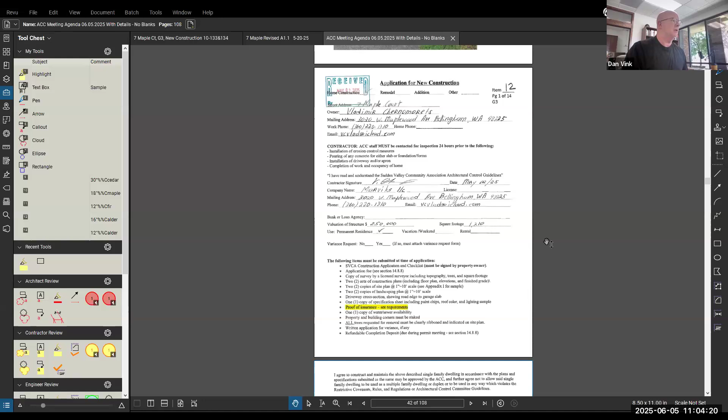Anybody have any comments about this one? I think my only comment was the driveway. It technically falls within the driveway slope limits, just barely, but what does it look like from a neighborhood standpoint? Is it backing out onto a busy street? Is it gonna create any problems? We didn't visit this one. Are we gonna end up with off-street parking? Yeah, we didn't visit this property. Do you have any opinion on that at all, Joel?

Maple Court is a little bit more of a narrower road, at least when it gets down below. So we're going downhill here as we move to the north. And there is no roadside parking being proposed right now. Well, it's never intended. I'd have to go out there on site and take a look around for those elements. But just based off my memory, I know it does get narrower down there. You get to the asphalt.

And I think I looked this up on Landglide. It says it's a double lot. It still shows the lot line, but that lot line has essentially been removed for the purposes of the approval, right? They're technically encroached on the second lot, but at least according to Landglide, that second lot doesn't exist anymore. It's all just one large lot now. So this is a merged lot? Right. Okay. And they can never divide it again. Right. To the best of my knowledge.

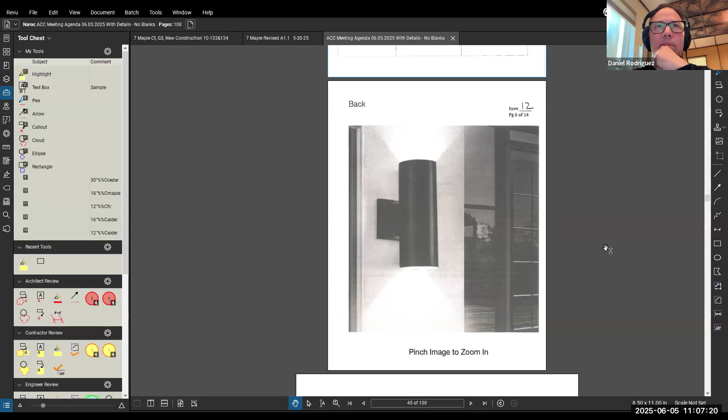Joel, when you buy those, do they generally have a cap that they put on there, or is it an option? It depends on the model. Okay. Most of them do have a glass top. The ones that shine upward do have a glass top. A lot of them that I've seen, as a correction to come in line with the policy, the builder will remove the glass top and spray paint the inside or the outside of it black, or put some other cover on there so that it isn't shining upward. So that's one thing I want to note, that the lighting should be downward shining only.

The question I had, we don't have the lines for the existing homes. Yeah, there are. I had a question about the heat pump or air conditioner that would be put out there. Do we have an indication where that would be? I don't think we have that information. Our policies, I think, only require the location of the propane tank. My concern would be that if the house is right next to that, and if they decide to put a heat pump or anything in that space, it could be kind of loud, so we might require some sort of sound barrier. Let me see where those houses are located.

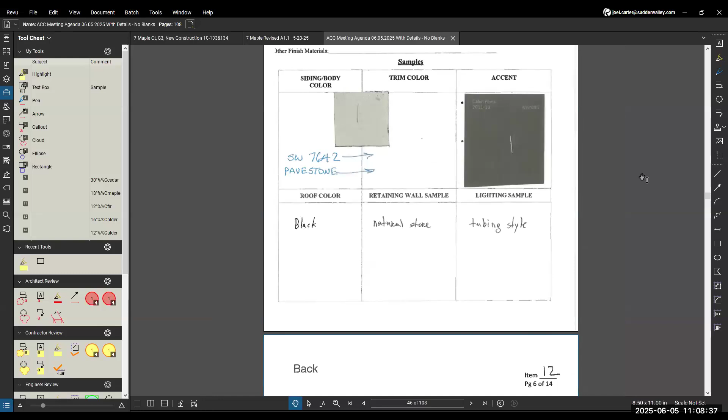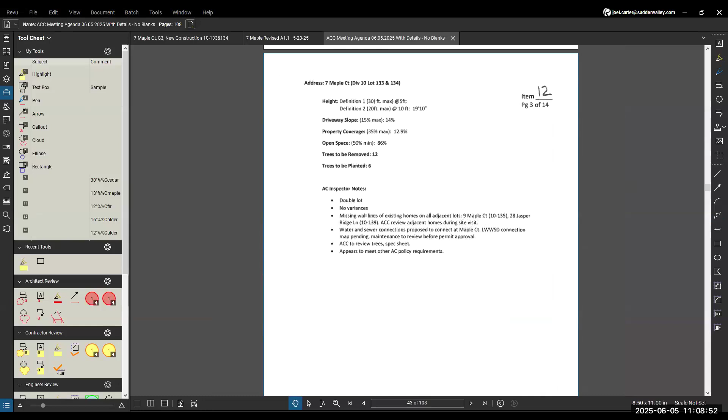Which lots they're on. There is a house to the north, 9 Maple Court. And then there is one, I think, to the rear at 28 Jasper Ridge Lane. It's kind of odd that you would have that whole space and you would build your house right up against the edge. Who do we have? Vlad? Yes, this is Vlad. Vlad, why is the house pushed all the way up to the left side? That's what the plan was. I purchased this lot already with the county permit. Okay. I just go from that.

Do you know where the heat pump or air conditioner would be positioned? I think we're going to do not a heat pump but a furnace. There's no heat pump on the plan, so we're not going to put a new heat pump. We're just going to do the furnace in the garage. Okay. If you moved it back into the middle a little more, you could put a different driveway in there and probably take the slope out. Yeah, there's quite a bit of space here. I'm thinking maybe just push it to the right a little bit, because we have plenty of space there, if you guys don't mind.

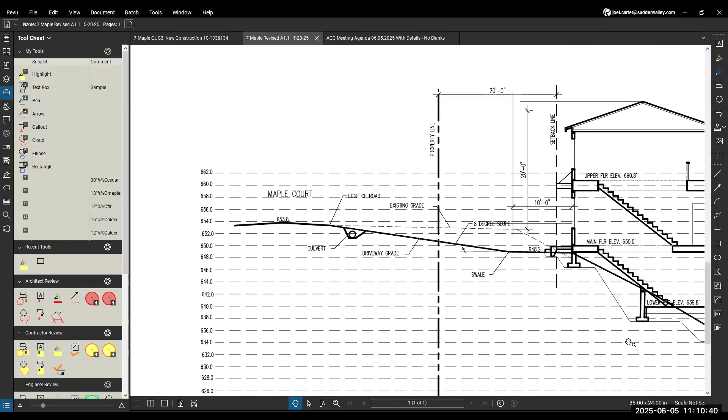No, I think that would be preferable. The driveway goes down too, right? It slopes down from the road, not up. Yeah, it goes down a little bit. It's going to be pretty much flat. If you slid the house back, is that going to help with the driveway slope or make it worse? If I push it back, it's going to be worse. I can move it to the right a little bit, because the lot itself is sloping down. I'm sure your neighbor would be happier if you moved over a little bit. And if you could mitigate that driveway at all, I think that would help too. Yeah.

Based on what we're seeing there, it doesn't look like the elevation changes a whole lot. If you shifted it to the right, you could leave the driveway entrance off Maple in the same spot and just elongate it on a bit of a turn, and that would reduce the slope. I just know that those short, steep driveways are a pain. Long, steep driveways are a pain too, but not as much. So does it flatten out at the top before it goes into the garage?

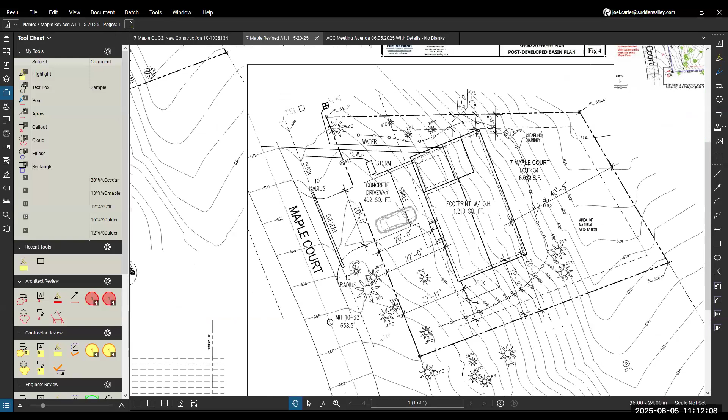Or the bottom, whatever. The nearest area, Joel, it has to be flat right there, or the existing grade. Wait, the existing grade there does look like it's a little flatter on top, currently, based on the topography lines. So it's got a driveway from the edge of the road here at 8 degrees, and it does provide for a little bit of a swale here to catch the stormwater, and then some. Looks like about 10 feet of

more flat driveway. So the driveway slope could be reduced further if it was a straight line from the edge of the road to the garage slab, but you do need to have at least some amount of it. He's got to get his stormwater into his stormwater system, and then maintain the proper elevation to run that stormwater system into the ditch. And so if that pipe gets too far down here in elevation, he might have to install a pump and then pump it uphill to get to that same ditch. Does that make sense?

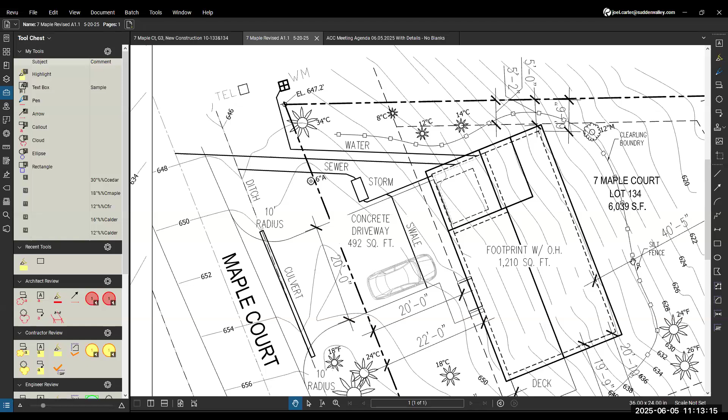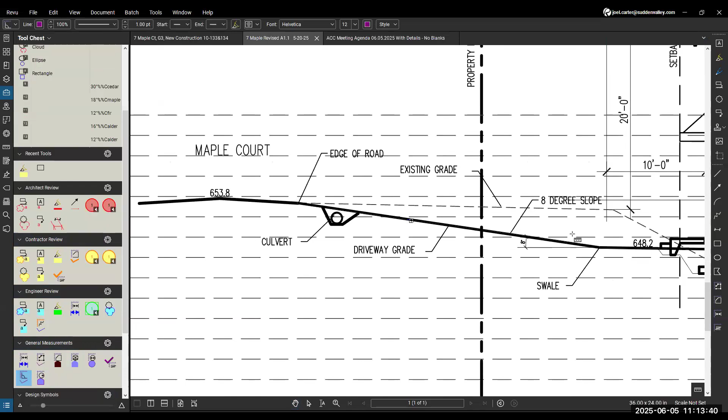Yeah, if we're going to flow stormwater with gravity. From that drawing, it doesn't look like 14%. It doesn't look like that bad a driveway. Oh, the driveway? We can measure it. That doesn't look too scary to me. Yeah, so the driveway, it's 8 degrees. And we got 20 feet of driveway in front of the house, plus from the property line to the road it's about 20 feet there. So it should be about 40 feet of driveway. 8 degrees is 14% slope. Okay.

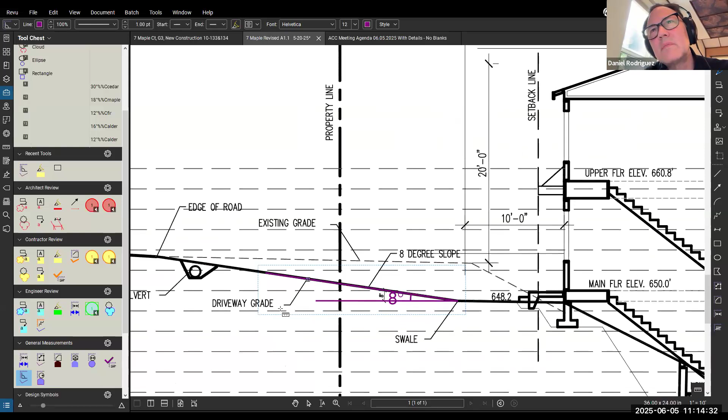And what is the distance from the property line on the left side? Is that 5 feet? From where to where, Dan? The left side of the property line to the setback there, is that 5 feet on the left? Oh, in the front here we've got 20. No, sorry, on the left side of the house, when you're looking at the house. Yeah, left side of the house, we're at 5 feet here. Yeah, that's pretty tight to have all that space on the right side and push it all the way 5 feet. I'm just thinking about the neighbor next door. I don't know where the house actually sits, but it could potentially be just 10 feet away from the other house. Yeah, the neighbor is farther away on the left, so it's maybe 30 feet away or so.

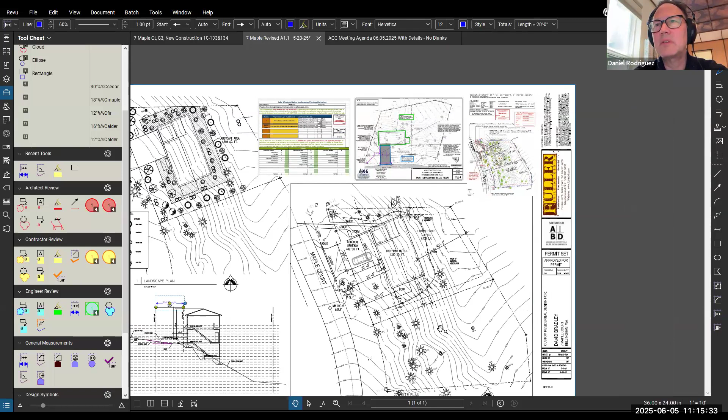So when you bought the plans, the house was 5 feet away from the property line with all that space on the other side? Yeah, that's what was on the plan, but if you guys approve, I can move it to the right a couple feet to get more space from the property line. It doesn't affect anything, I think. Yeah, if I were the neighbor, I would definitely want to see it pushed over a little bit anyway. If you got the space, do it. Yeah, it's probably a good idea to do it. And then maybe put some kind of texture on the driveway. 14 is within our legal limits, but it's still a bit steep, so I think we would need some kind of broom finish on that. Yeah, obviously there's gonna be some texture. Make sure it's good.

The other thing, if we can move this thing over, I appreciate you willing to work with us. Given that it's a double lot and we got a ton of open space and property coverage to work with, if you stand on the street looking at the house and put a concrete extension on the left side of the driveway, somebody could back out of the garage and then turn and drive up the driveway. I just know that backing up a steep driveway onto a road is really, really tough to do.

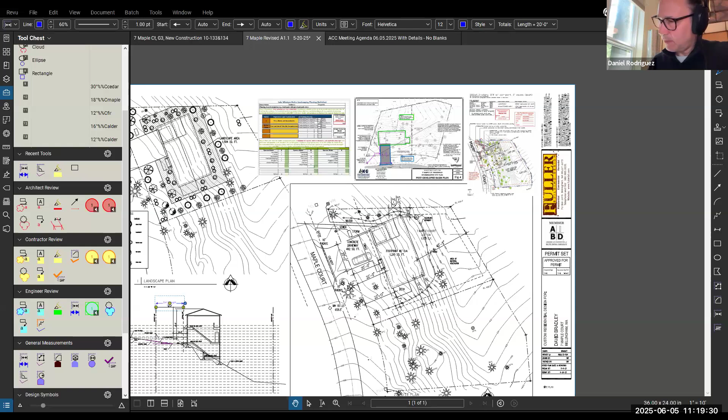Okay. All in favor of Dan's motion? Aye. Aye. All opposed? Okay. Thank you, Vlad. Thanks for working with us. Okay, sounds good. I'll redo the site plan and probably just resubmit at the next meeting. Yeah, it sounds like you're in good shape. Thank you so much. Appreciate it. Bye.

Alan, do we have anybody else waiting for us? Alan? Alan got bored. Yeah, I stepped away, but I don't see any other attendees.

Okay. All right, let's go up to item 3. I'll move to approve. No further questions? All in favor? Aye. Aye. Aye. All opposed? Okay, that sounds unanimous.

Are you with us, Alan? He's probably gone to lunch. All right, item 8, 46 Rocky Ridge Drive. Can you hear me now? Yeah. Oh, I apologize. I was on double secret mute. My laptop and my headphones were muted. I apologize. Did you hear us? I did, all along the way.